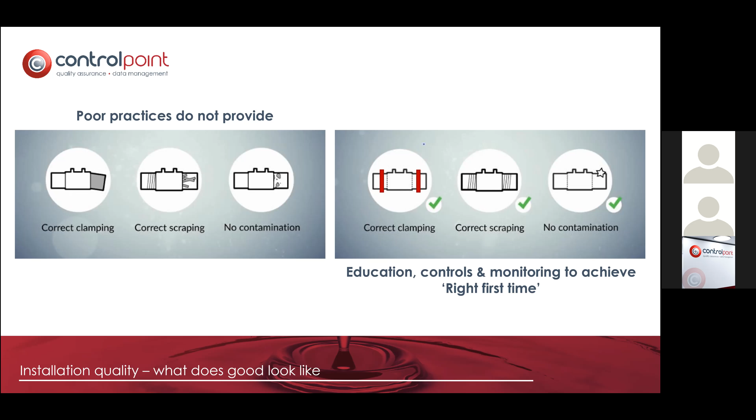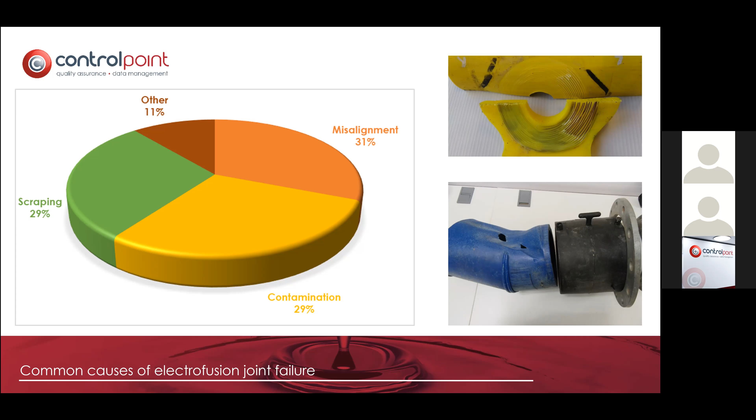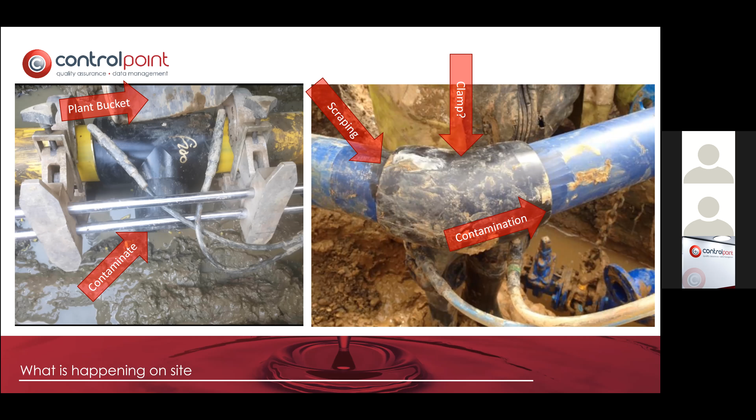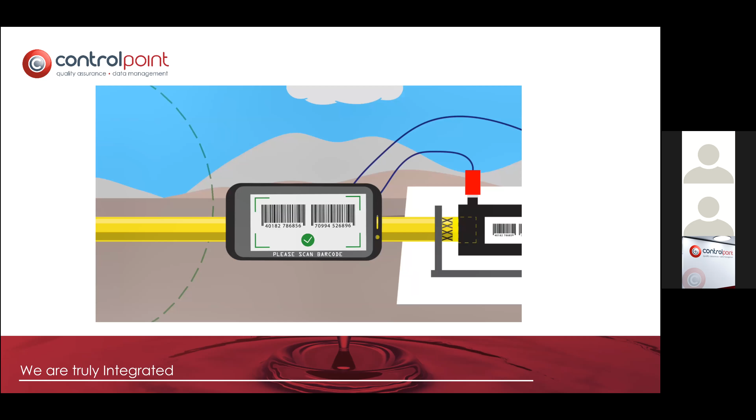People often ask how we get the data. We have a truly integrated approach to collecting data from electrofusion boxes. We've spent many years developing apps, and thankfully since the advent of smartphones, we've been able to use those to our best advantage. And this short animation just shows you the way that we collect data. So inside pretty much all electrofusion boxes in the UK, there is a Bluetooth chip. Once it's controlled by our app, you can then scan the fitting details to enter onto the box the correct weld time and the traceability.

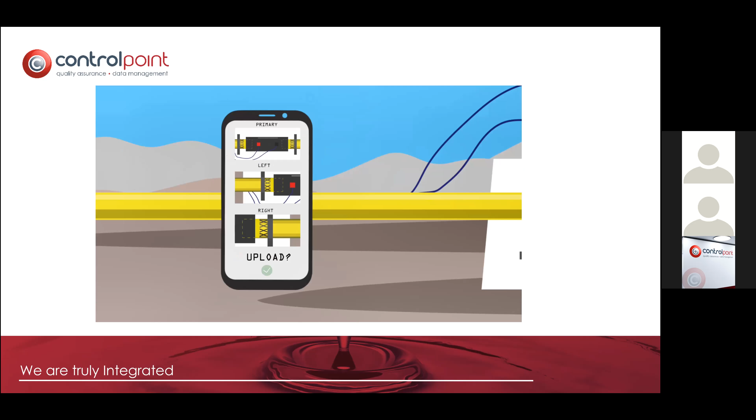It then allows you to take photographs of your joint. So one from above showing the clamp, one from the left-hand side, and one from the right-hand side showing that it was clean, that it was scraped. The operative can then review the photographs before sending, and once they've sent the photos, the box will begin to weld. If the weld doesn't complete, alerts will be generated.

Assuming it does, then we collect the data from the box. So we get the weld time, all of that data around barcodes, locations, photographic evidence. We even get the weather conditions as well. And we then uplift that data into the cloud so that we can use that information to give a client an indication of whether or not that joint is or isn't conforming according to their own standards.

Once we get the information back, we would have a human, and we're not saying we're going to get rid of all humans with AI, so nobody needs to worry that we're turning into that horrible Terminator-style film where robots are taking over the world. But a human will then inspect the joint and the photographs to look for what we would consider areas of concern or risk around how a joint's assembled.

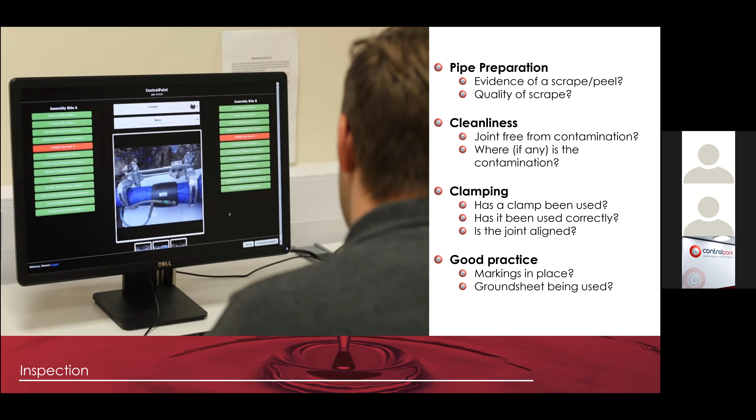We know that our apps are excellent from a behavioural tools perspective, because typically we would assume on the photos that I have shown you that no one has maliciously created a poor joint. A lot of it can be down to education, awareness, access to the right tools and equipment, or the challenging environments that they work within.

But again, what we do see where clients use them is that the app allows you to drive towards a much more conformant level of installations. And one of the areas that specifically is targeted by Ofwat in the water sector is around leakage of assets, in particular new assets.

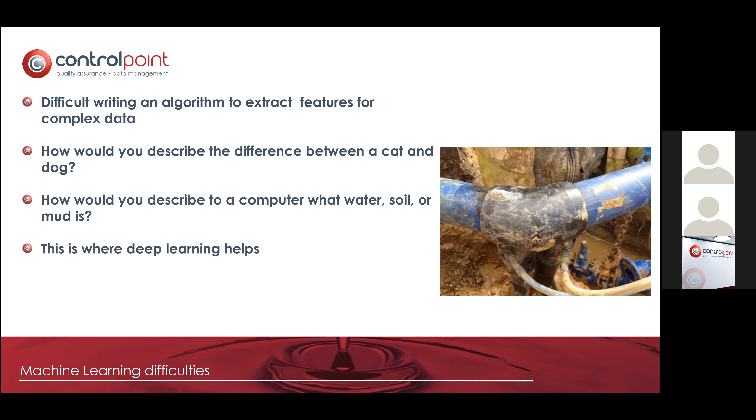However, this is where deep learning helps, which is the next slide I'm going to go over. So deep learning was developed around 2010, and this is described as a subset of machine learning that uses artificial neural networks that enable machines to learn similarly to how humans learn.

Now, there's a great quote that I came across from, I think, a Japanese researcher called Michio Kaku, and he describes the human brain as having 100 billion neurons. Each neuron is connected to 10,000 other neurons. Sitting on your shoulders is the most complicated object in the known universe. And this is what we are trying to mimic within a computer, to give the computer almost the Terminator style knowledge of being able to understand anything we throw at it.

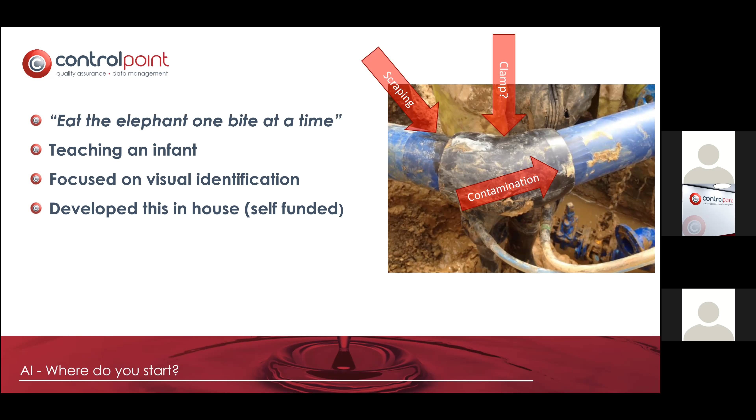We built a team that was passionate. There's nobody more passionate than the team of Andy and Fariba and Kin, who have all been responsible for developing this. And we remembered that we had a goal. We wanted something that was instant. So it was no good if we take the photographs and it takes a week. And the main thing that you've got to do with any innovation-based project or something that's really pushing the boundaries of what's been done before is being brave and not giving up.

So what I'm going to show you is a little video of how this now goes, and Andy will actually talk us through the video if there's bits that I miss. So I'm going to show you the video the first time.

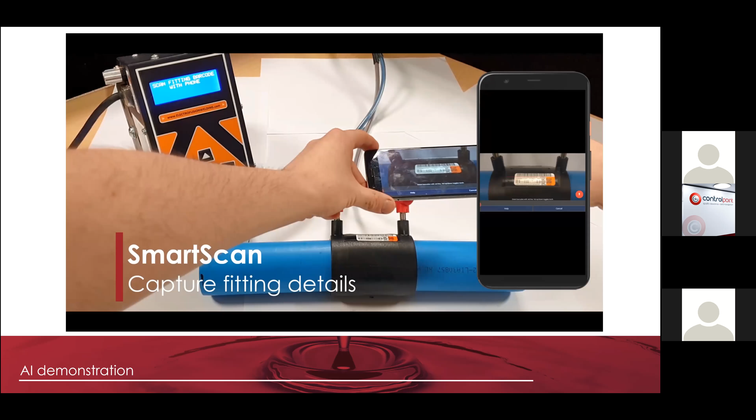So this is effectively the joint, as you can see on the screen. You'll be able to see that it hasn't been scraped because the writing runs through the actual pipe itself. We've got the coupler, we've got the leads attached, and we know that we're connected, paired to the phone through the box. So what you'll see is, as we showed on the video, we smart scan the fitting. That's the first step. That helps the AI have a fighting chance to work out what type of fitting it is. We then again take the photos from the left, the right, and the primary position.

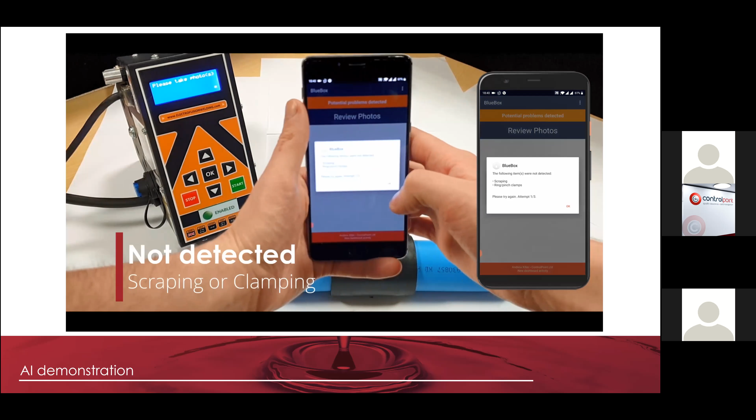And then what the app will do is, once we send those photos to the server, you can see in the large screen, it has identified that that was not scraped and was not clamped. It will then allow the operative to correct the issue. So you can see we've now scraped the pipe. The AI will check, but it now knows that it is scraped, but it isn't clamped. So then the operative would place a clamp in position. You would repeat the process, take your photographs to evidence that you've got a clamp. And this time when it checks, it would allow the box to weld.

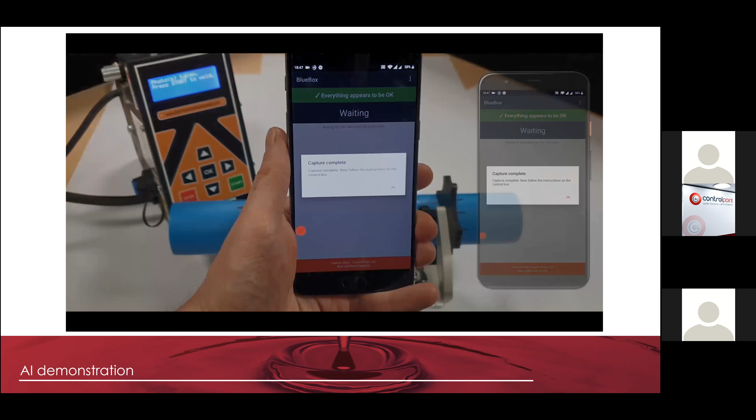So from a simplicity perspective, I'm going to show you that one more time. So if you see the picture on the screen, that is unclamped, unscraped, but it is clean. The AI in real time that you see on the phone displayed on the right hand side of this video is able to determine that that is either unclamped or not cleaned or not scraped in the time that we're showing you. So we haven't fabricated this. The only thing we've sped up is Andy's hands taking the photograph because it's not exactly the most exciting part of the process.

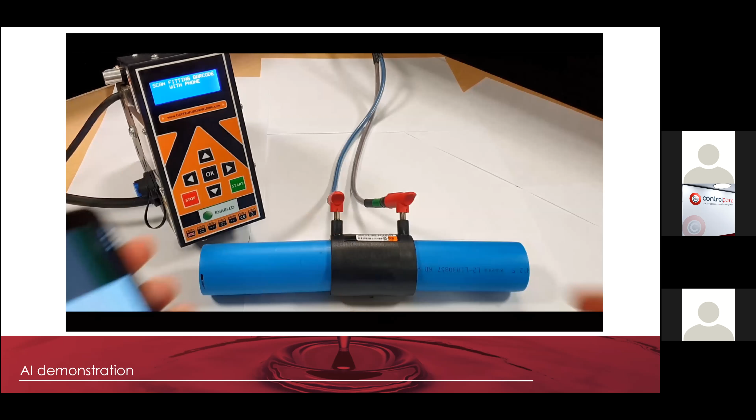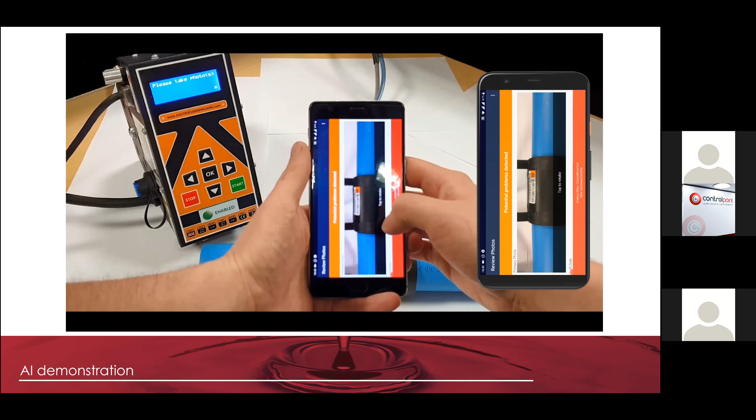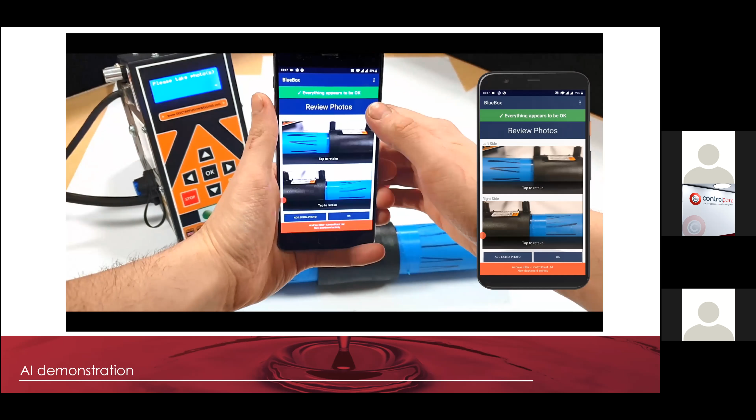So as I say, scan the fitting, collect all the traceability data, and it tells the Electrofusion box what fitting it is and how long it should be welded for. You take the photographs to evidence how you've prepared it. And then the AI will then inspect those photographs within a matter of seconds to say whether or not it meets the 3 baseline requirements. You can then either rectify the situation or you can prevent the box from welding if they don't rectify it. This time they've scraped it and the AI knows that now it is scraped, but it's not clamped.

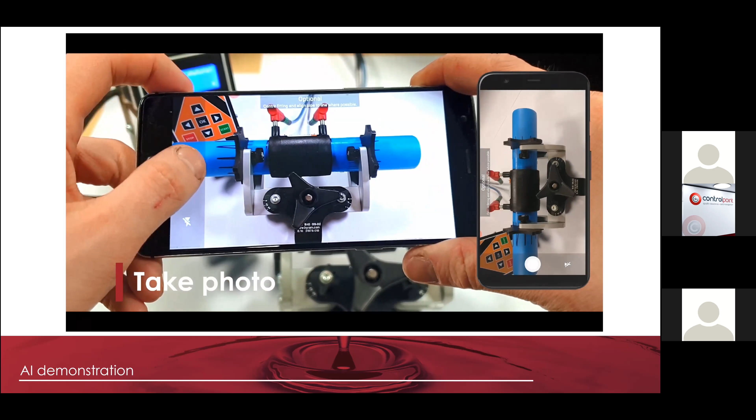You would then clamp it. So let's say you've left a clamp in the back of the van and you try to get this to weld without a clamp. If the client doesn't want that to happen, which we would hope many wouldn't, the AI box will prevent the weld from taking place. That is a really simple video, taking less than a minute, that shows what Andy and the team have spent the best part of 3 years developing.

Would I encourage anybody to have a go? No. What do you need? A massive database behind you in order to keep showing it variations and different pictures over and over again.

In terms of what it's doing, these are original pictures that Andy gave to me in the early days. Do you want to cover off some of this, or do you want me to cover it? Okay, cool. Give it both.

In a very simple world, when the AI looks at that photograph in the top right, it effectively starts to draw a box around what it believes looks like a clamp, based on us showing it thousands and thousands of pictures of clamps. So it knows it's a coupler, so it knows where it expects the clamp to be. It can recognize that there's pipe, it can recognize there's a fitting, it can recognize that there's leads present, and it can recognize the shape and the profile.

But there are thousands of variations of clamps. It's one of the challenges we have, is there'll be many people on this call who are manufacturers of said equipment. There's a variety, so you've got to teach it that not every clamp looks the same.

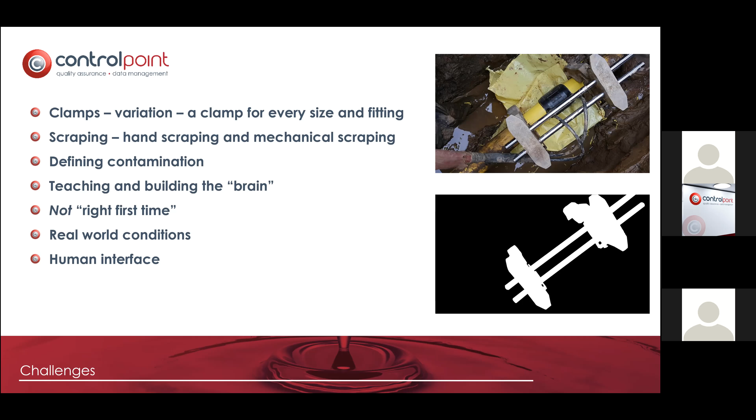And this is 3 slides now of examples of what the AI has done on its own method. So where it's got the box around it, that isn't something that Andy or I or the team have drawn. This is actually what the AI has drawn around it. It's looked at that photograph and it's seen enough difference in the color of pixels and the shapes that they produce in order for it to say, I believe there's a clamp present in that area. And you can see it'll work on, I think that's a 63mm coupler.

And then you can see it'll work on a service offtake reducer. You can probably see it better on the one on the right-hand side, but it is actually 99.9% confident that that in the picture is a clamp. It doesn't care that it's a clamp, it just recognizes that that's what a clamp looks like.

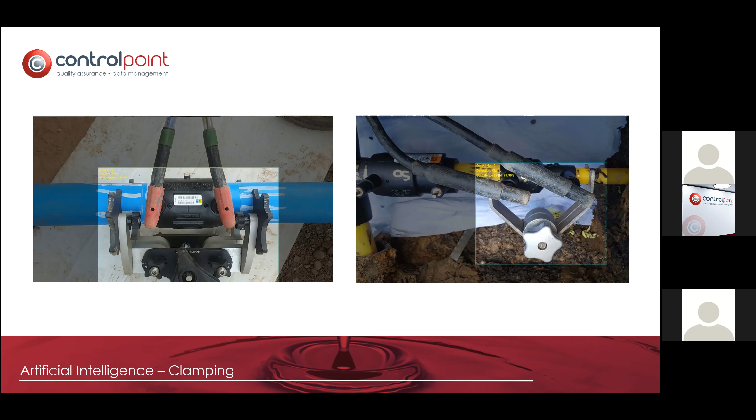In this image, we're looking at scraping. Scraping is obviously a bit more challenging because there's less of it usually visible in the picture, but it's been able to detect on that coupler where it's been mechanically scraped. It can even see through the scraping between a service offtake on a high flow top tee and a coupler, even though it's covered in yellow pen, because of how it's looking at the images itself.

And again, you've got another example on the right hand side where you haven't got a change in color. It's a black coupler on black pipe, and yet it's still able to determine that that is scraped. Interestingly, on the left-hand side, it's only 94% confident, which is pretty high, that it's scraped. But on the right-hand side, due to how the image is taken, probably light levels and how the pixels relate, it's 98.9% confident.

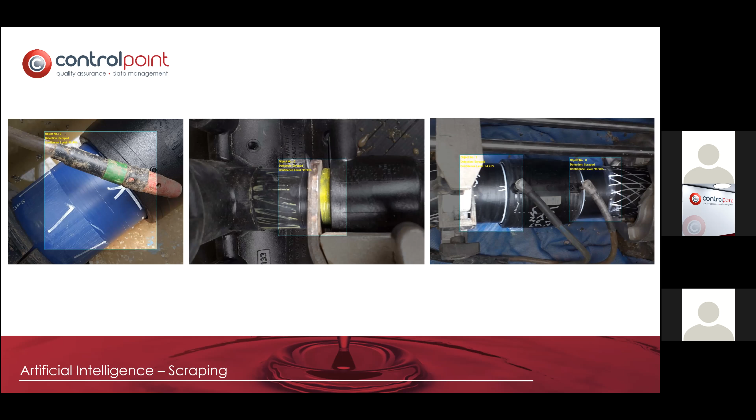Cleanliness is a big factor in electrofusion joint failure. The system is able to detect the most common forms of dirt, dust, and water. The one that always interests me is the one in the middle - the computer has drawn a very small square around the key area for concern, which is between the fitting edge and the fusion zone.

And it is 95% confident that that joint is wet. We can obviously see it as a human, but we know what we're looking for. But a machine that Andy, Kin and Fariba have taught has got the ability, which still blows my mind, to work out that those little droplets of water are something that shouldn't be present in the photograph. And again, the final picture shows the level of confidence based on the photographic images that we've got.

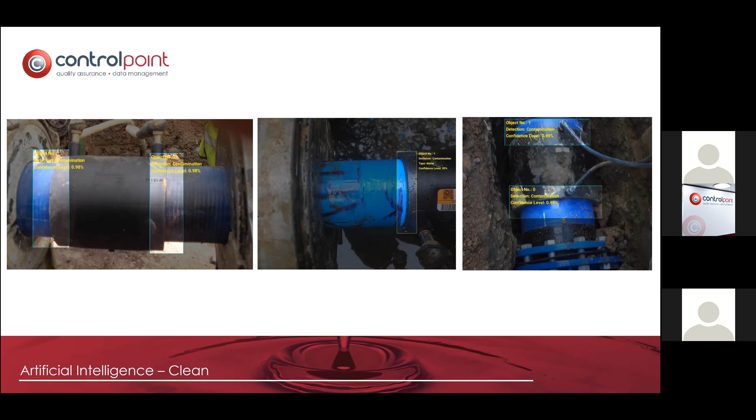Should you use that data, what you would see as a user of the system is one single set of tick boxes. I've done it as 3 tests so you can see how it works. You would see in the first image it can't see all of the clamps - it's not certain it is fully clamped because it's a coupler. It can see it was scraped on that side and you can see it's clean. It then continues to check each one of the images. If you take 5 photographs, it'll check the 5 photographs. So there is a way of working through it should you not be the best at taking photographs.

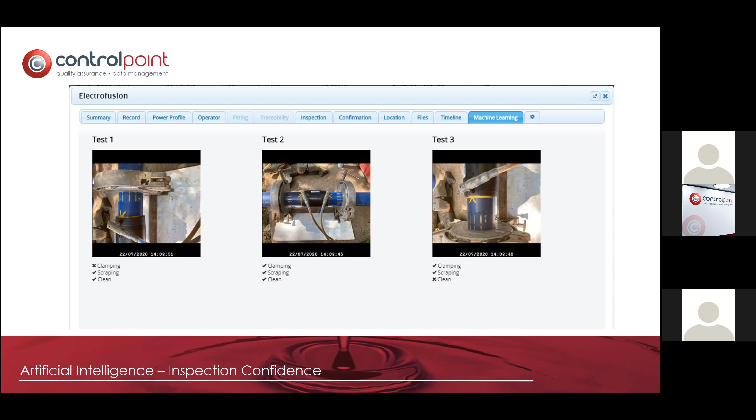In terms of trials, and the reason that we won the award is, I'm not here today telling you about something that doesn't exist, something that's lovely that might come in another 3 or 4 years' time. I'm telling you about something that does exist, that is used by certain clients at the moment.

We did initial trials with J.M. Bentley and Yorkshire Water to test really, not did the technology work, but to test the human interface, to test how it performs in areas of lower signal. We don't need 5G for the AI to run. We were focusing on a live element.

So we have a system that allows, if the AI detects something that it's not happy with, if the client wishes, they can actually send that to a human inspector. The human inspector can then check, and then they can allow the box to proceed.

One thing we would always say is it'll never be 100%. The same as you'll probably never be 100% sure what type of dog or breed it is. You'll kind of know it's a dog, but you'll never be 100% certain because there's so many different variables. But it will be certainly confident enough to help you make the right decisions. And that's why we were super proud to physically win the award for the best onshore pipeline technology award.

We're kind of coming towards the end now, just mindful of time as well. So what did we deliver? I say we, I've done my bit in terms of getting it trialed outside, but really it's down to the guys internally here. We've delivered, and we always laugh when we add the word world in front of it, because if you are the first to do it, likely you are the first in the world. We have delivered the world's first artificial intelligence inspection system for EF jointing.